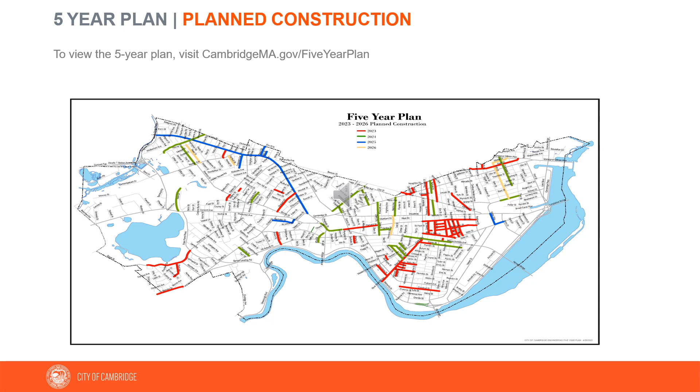To view the 5-year plan, visit cambridgema.gov/5-year plan. The City Council adopted a Complete Streets policy in 2016. Complete Streets is an approach to planning, designing, building, operating, and maintaining streets that enables safe access for all users who need them.

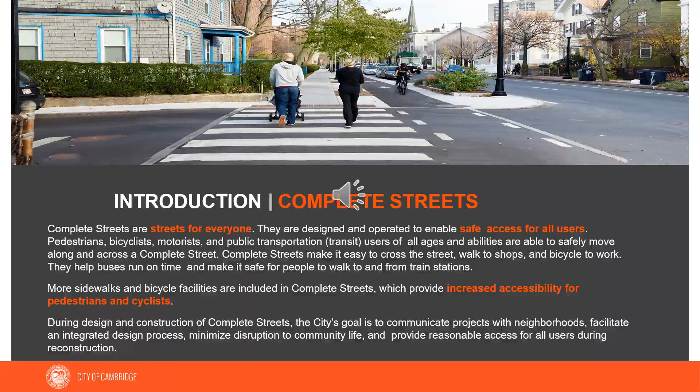Vision Zero is another important policy adopted by the City Council in 2016. Vision Zero recognizes people make mistakes, so policy and design should ensure those mistakes do not result in fatalities. As part of this effort, the City of Cambridge has reduced speeds on most streets to 20 miles per hour. To view the Vision Zero policy, visit cambridgema.gov/Vision Zero.

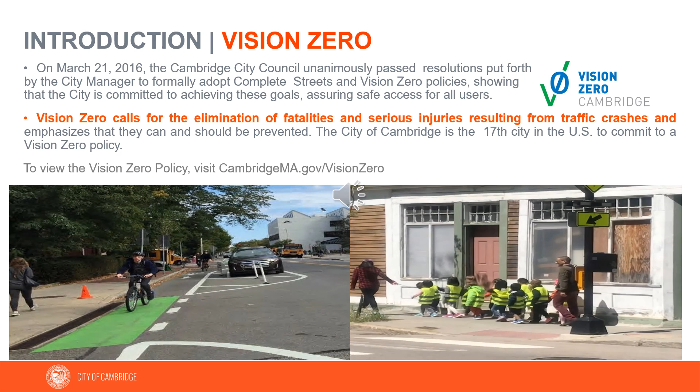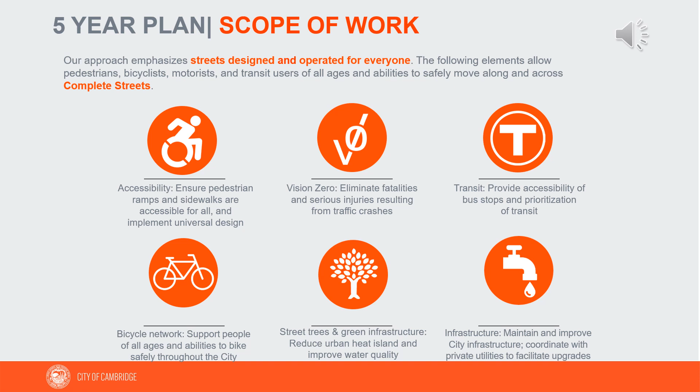The elements shown on this slide are utilized by engineers, designers, and planners to achieve the goals of the policies adopted by the City Council. The Cambridge Growth Policy and Vehicle Trip Reduction Ordinance places an emphasis on sustainable modes of transportation to promote livability, improve air quality, and reduce gas emissions. Bus stop design must follow MBTA standards to ensure access to the bus by people of all abilities.

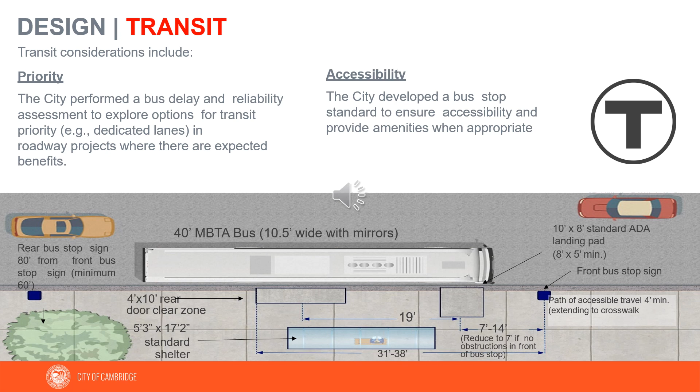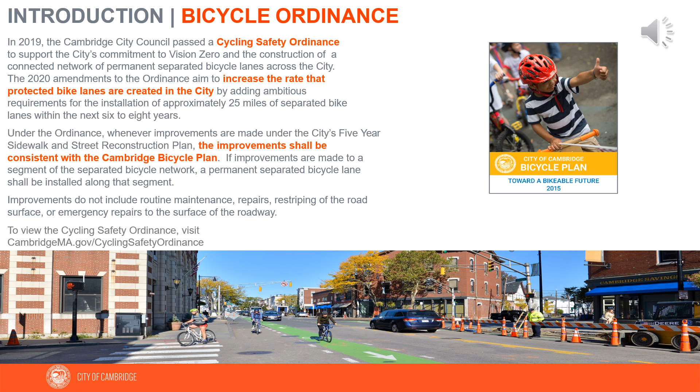The Cycling Safety Ordinance, or CSO, is intended to provide bicyclists of all ages a comfortable space to ride. Separated bike lanes have buffer space and physical barriers between the bike lane and parked and moving cars. Bike use is growing rapidly in Cambridge, and we are adapting our streets so that cyclists are as welcome as motor vehicles. To view the Cycling Safety Ordinance, visit cambridgema.gov/Cycling Safety Ordinance. The CSO directive, guided by the vision of the city's bicycle plan, informs roadway infrastructure projects in Cambridge. We strive to make the streets safe and comfortable for people of all ages and abilities.

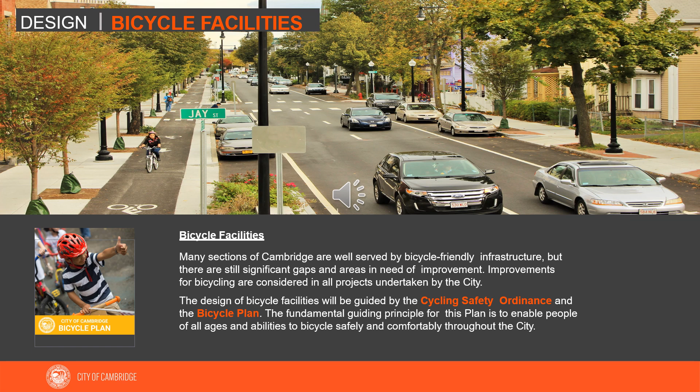All these policies and plans provide a basis for our design process in a general sense. We then work with residents on detailed design options for specific projects, as each project is very different in terms of their opportunities and constraints. We take all this information in addition to input from the community and develop a scope of work for improvements. How do all these plans and policies translate to specific street and sidewalk designs?

Starting with accessibility. Why is accessibility important? Number one, it's the law. Both federal and state regulations cover the construction of sidewalks and require newly constructed sidewalks to be accessible. And number two, and more importantly, it's the right thing to do. We want our sidewalks to be as inviting and usable as they can be for people of all ages and abilities, people using wheelchairs, walkers, or pushing strollers.

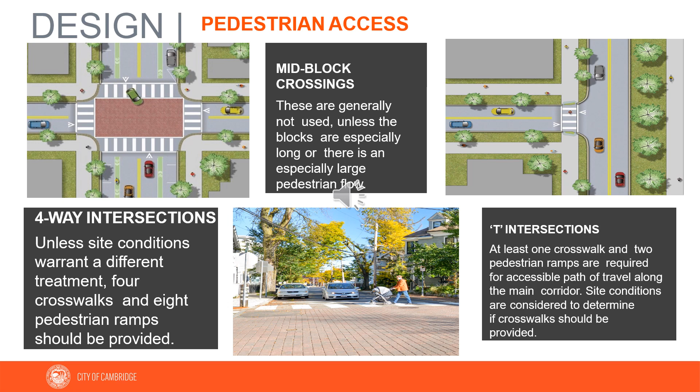As sidewalks are being redesigned, the team needs to identify and address existing deficiencies in the layout. Federal ADA regulations require that at existing pinch points, such as street trees, hydrants, and utility poles, the city is required to provide 36-inch minimum compliant sidewalk clearance between these fixtures and the back of sidewalk. In locations where achieving this minimum clearance is not attainable, the city may be required to construct a new 36-inch compliant sidewalk around this obstruction. This is achieved by constructing a bump out around the obstruction and into the roadway.

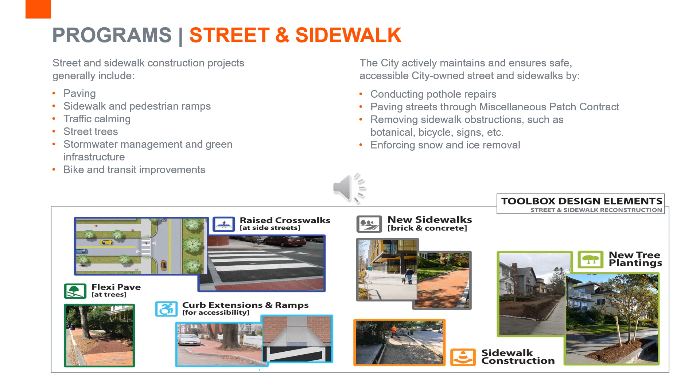Curb extensions have many benefits, including reducing the crossing distance, improved accessibility, and preventing vehicles from parking within 20 feet of the intersection, all of which improve the visibility of both pedestrians and drivers.

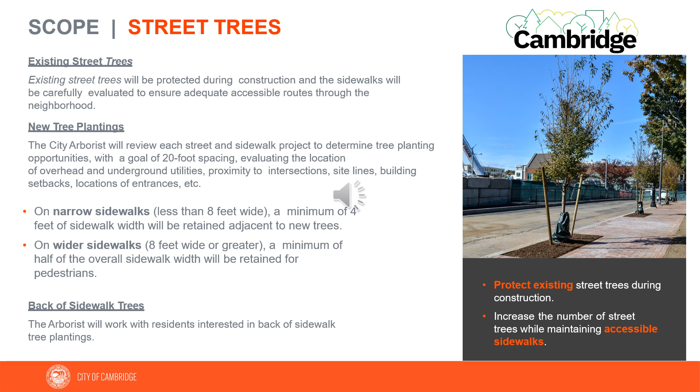The Cambridge Climate Plan and recently completed Urban Forest Master Plan document Cambridge's commitment to maintaining a healthy environment in the face of a changing climate. These plans include specific steps we can take to slow down climate change by lowering greenhouse gas emissions and helping us reduce impacts of climate change by, for example, providing increased tree canopy to reduce impacts of increasing heat waves.

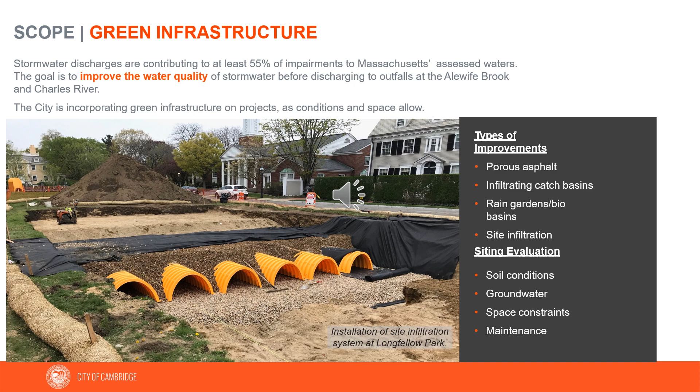Green infrastructure, or GI, is part of Cambridge's efforts to improve the quality of stormwater before it is discharged from the local drain system into the Charles River or Alewife Brook. GI refers to a variety of techniques which use natural processes, such as specially selected plants and soils, to promote infiltration of stormwater into the ground or to remove pollutants such as phosphorus from stormwater. The city has successfully implemented GI on a variety of roadway projects, ranging from major corridors like Western Avenue to residential side streets in West Cambridge. We are committed to incorporating these types of environmental improvements into smaller projects as conditions and space allow.

The plan shown on the next 4 slides is the existing condition survey plan and will be utilized as the starting point for design. It is important that residents who live along the street share their specific needs, concerns, observations, and feedback to the city to assist in addressing street-specific concerns of everyday users.

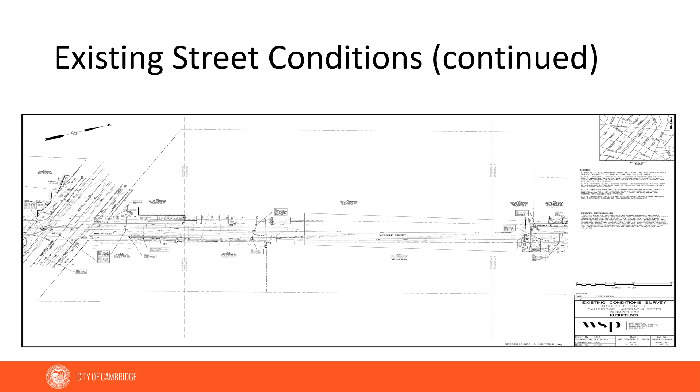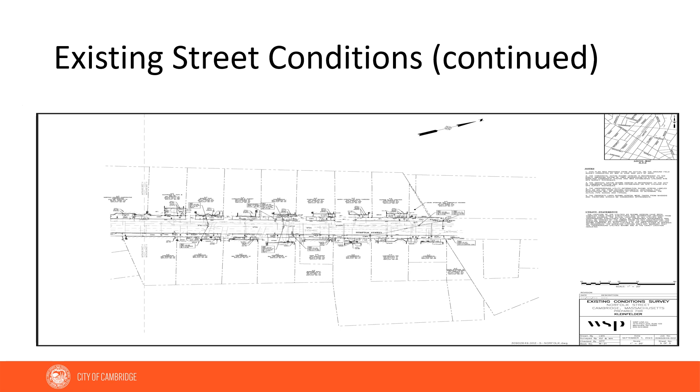We are starting a community process to gather ideas, information, and feedback. Please take this brief survey to tell us about your experience on Norfolk Street. We will consider all feedback we receive, not just survey responses.